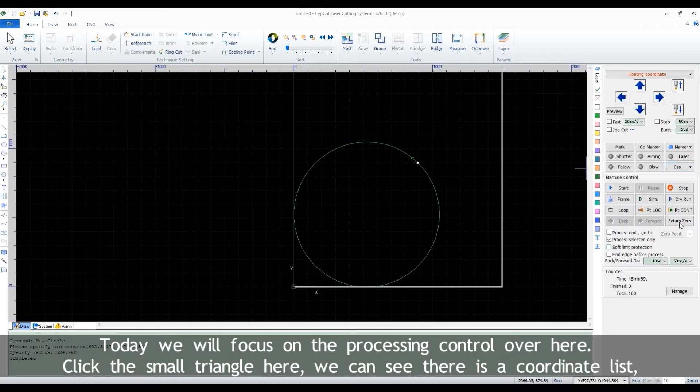Today we'll focus on the processing control over here. Click the small triangle here. We can see there is a coordinate list: floating coordinate, and several workpiece coordinates.

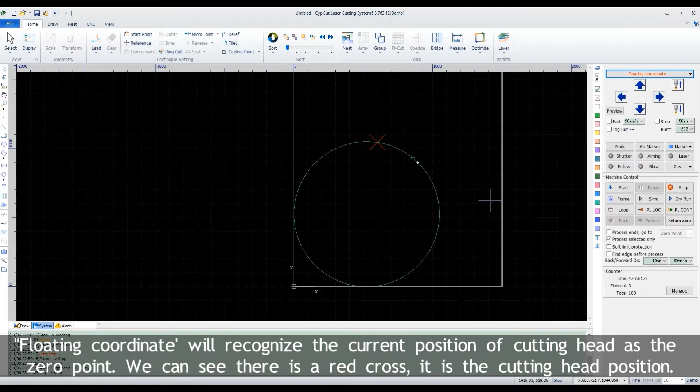Floating coordinate will recognize the current position of the cutting head as the 0 point. We can see there is a red cross; it is the cutting head position. Let's try to move the cutting head to any place and click Preview. We can see the 0 point has moved to where the cutting head is located. If we start cutting now, it will run the process at that position.

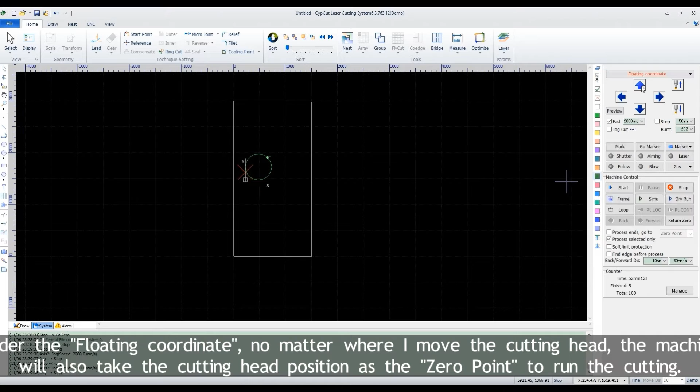Under the floating coordinate, no matter where I move the cutting head, the machine will also take the cutting head position as the 0 point to run the cutting.

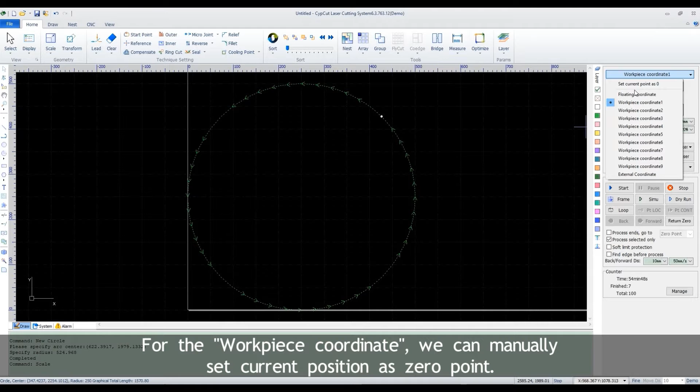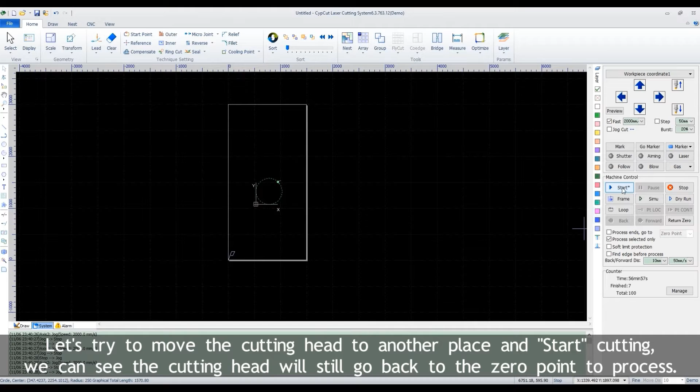For the workpiece coordinate, we can manually set the current position as 0 point. Let's choose workpiece coordinate 1. Move the cutting head, and we set the current position as 0 point. Let's try to move the cutting head to another place and start cutting. We can see the cutting head will still go back to the 0 point to process.

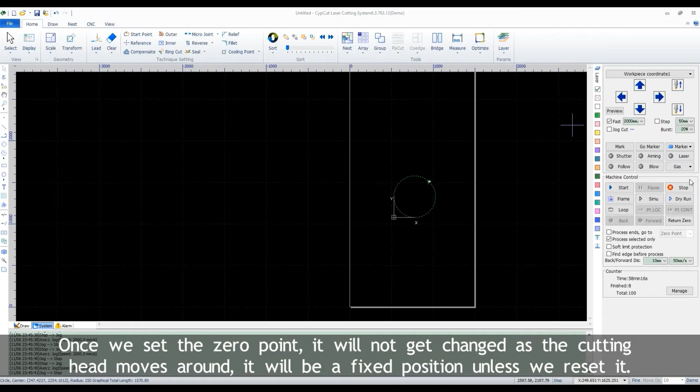Once we set the 0 point, it will not get changed as the cutting head moves around. It will be a fixed position unless we reset it.

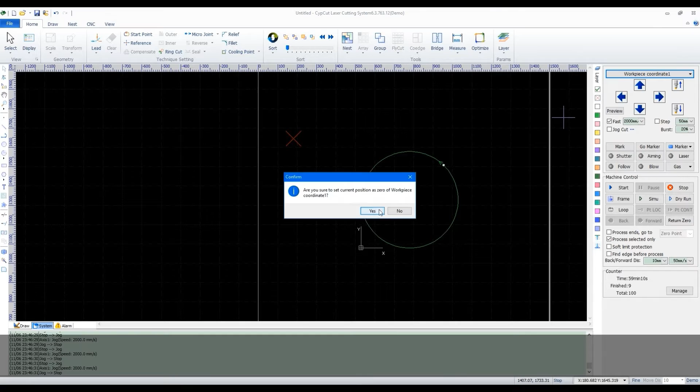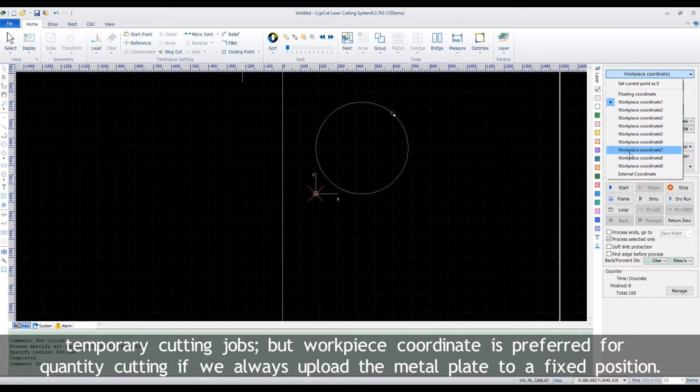Here we can tell the difference between floating coordinate and workpiece coordinate. Floating is more suitable for some flexible and temporary cutting jobs, but workpiece coordinate is preferred for quantity cutting if we always load the metal plate to a fixed position.

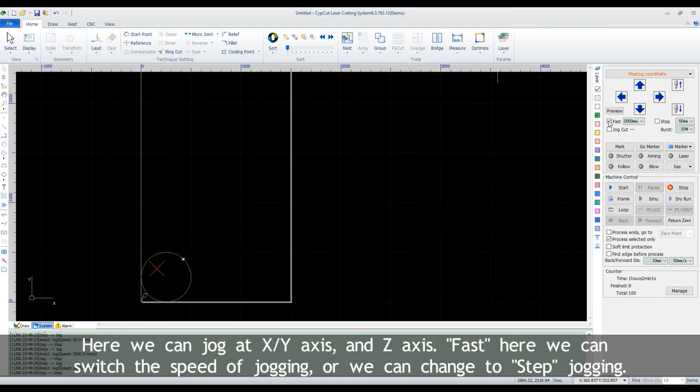At the bottom here, we can find accessorial functions to show mechanical or program 0 point or set 0 point. Here we can jog at XY axis and Z axis. Fast here we can switch the speed of jogging, or we can change to step jogging.

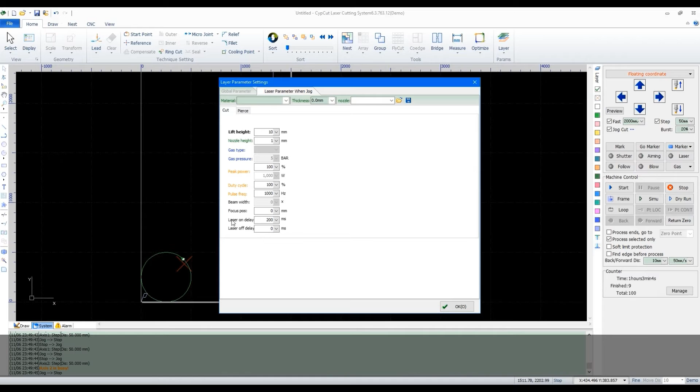Jog cut option: if we tick it, the machine will process cutting while jogging. It will help us to cut off the plate. We can set the cutting parameters at the ellipses. Burst is the powerful laser with just 10 to 20, especially when we try to find a concentric point between laser beam and nozzle. You can find a video on nozzles up here.

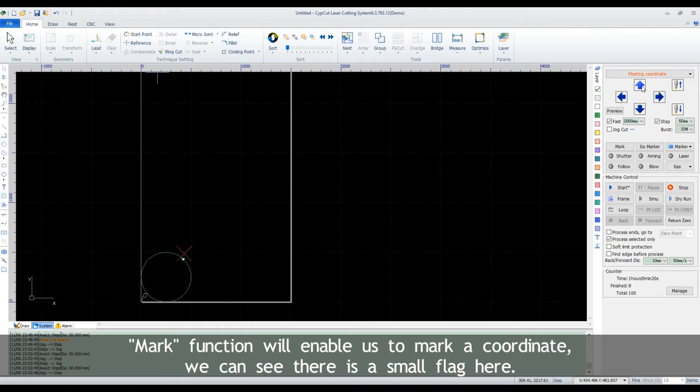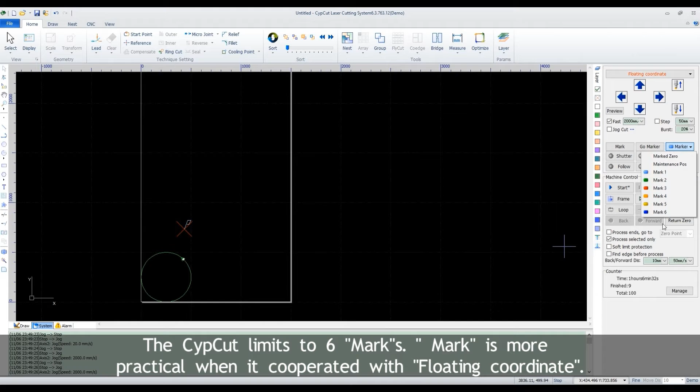Mark function will enable us to mark a coordinate. We can see there is a small flag here. Let's move the cutting head a little. When we click Go Marker, we can see the cutting head will go back to the flag position. CypCut limits to 6 marks. Mark is more practical when it cooperates with floating coordinate.

It runs in demo, no connection with the laser source, so here I cannot enable the shutter, aiming, laser. When we click Follow, the cutting head will follow. Blow will make the auxiliary gas blow out. We can choose the gas types here. It's in demo, so I cannot find the gas types.

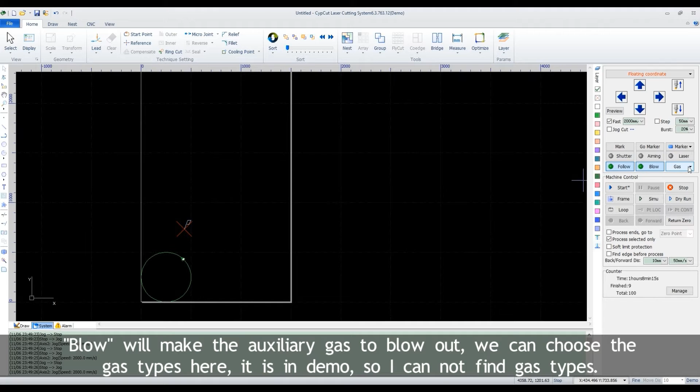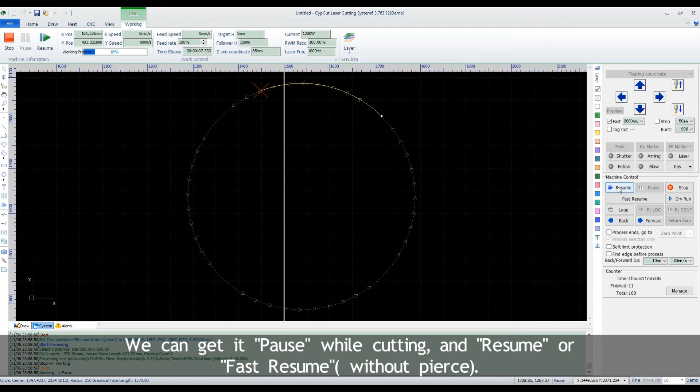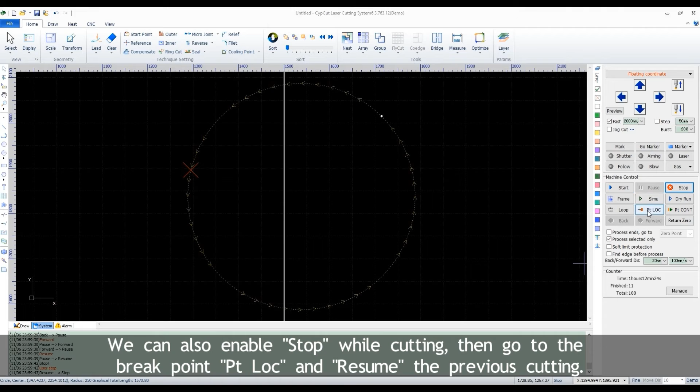Next is the machine control part. If we click Start, it will begin cutting the circle. We can pause it while cutting and resume or fast resume. We can go back a distance or forward a little to continue the cutting. Here we can set the distance and the speed for back and forward. We can also enable stop while cutting, then go to the breakpoint, Pt LOC and resume the previous cutting.

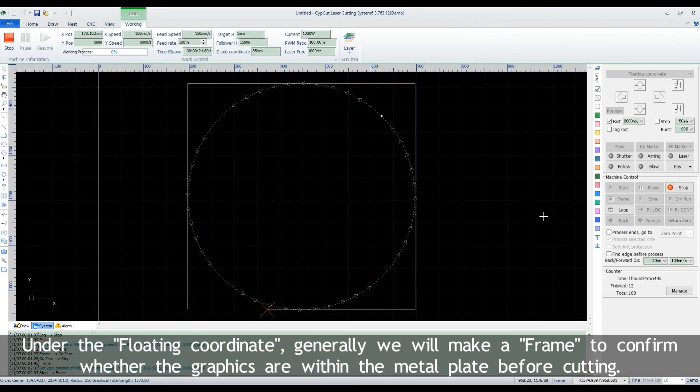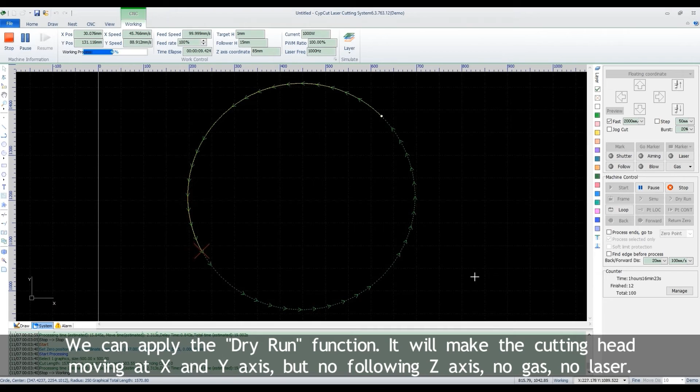Under the floating coordinate, generally we'll make a frame to confirm whether the graphics are within the metal plate before cutting. We can check whether the sorting is fine by simulating the process. We can apply the dry run function. It will make the cutting head move at X and Y axis, but no following Z axis, no gas, no laser.

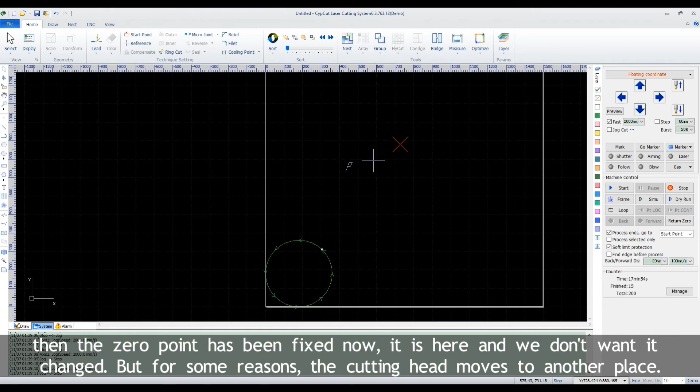Under the floating coordinate, like we're going to cut the circle, we make a frame first. Then the 0 point has been fixed now. It's here and we don't want it changed, but for some reason the cutting head moves to another place. If we want the cutting head to go back to the 0 point, we can click Return Zero. It will go back.

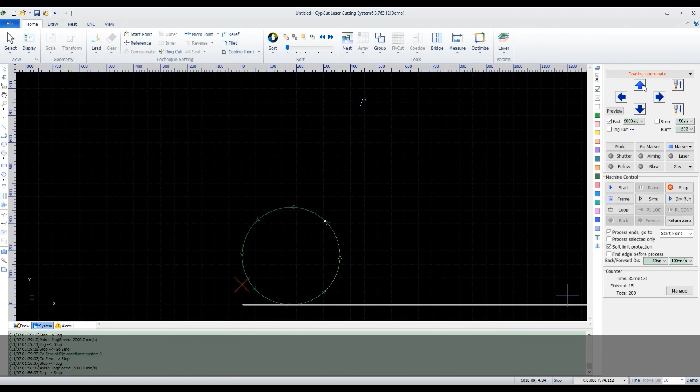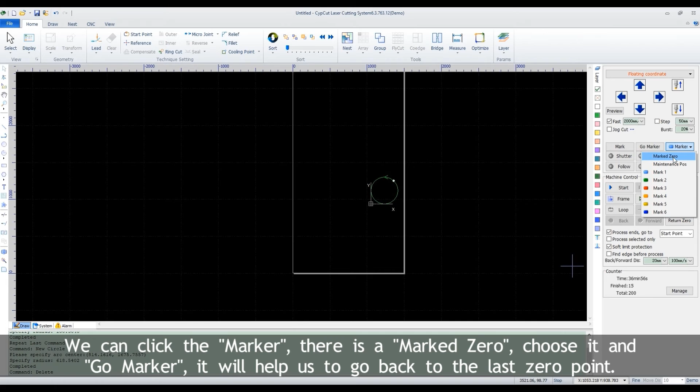The 0 point will get changed every time we use the frame function. Here, let's make the first frame. We can see the first 0 point is here. Let's make the second frame. We get the second 0 point. But if we want to go back to the first 0 point, what should we do? We can click the marker. There's a Marked Zero. Choose it and Go Marker. It will help us to go back to the last 0 point.

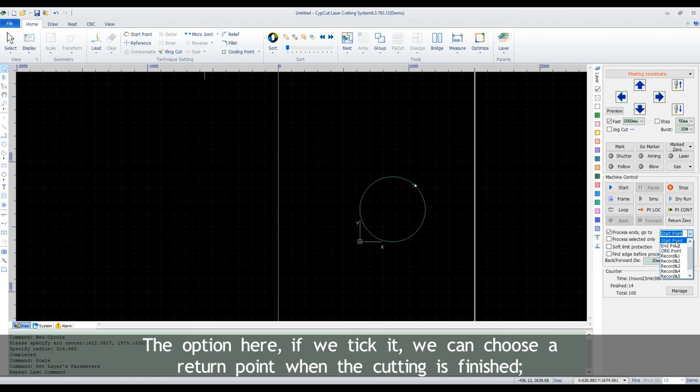The option here, if we tick it, we can choose a return point when the cutting is finished. Process selected only will only cut the graphic we choose. Like the rectangle and circle, we choose the circle and tick the option. We can see it doesn't process the rectangle.

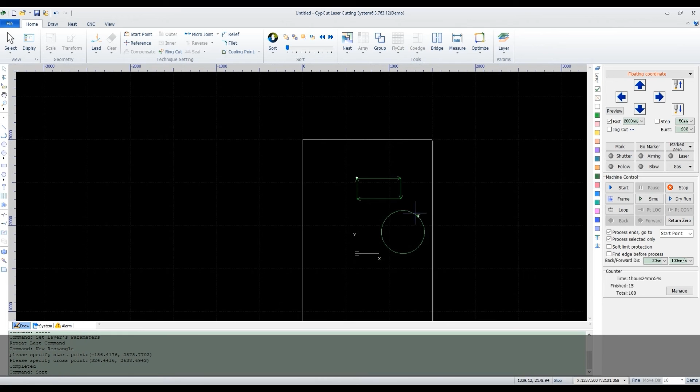Soft limit protection: if we tick it, the cutting head isn't allowed to go outside of the table. We just tick it under normal operation unless our machine needs to be adjusted under a professional engineer's guidance.

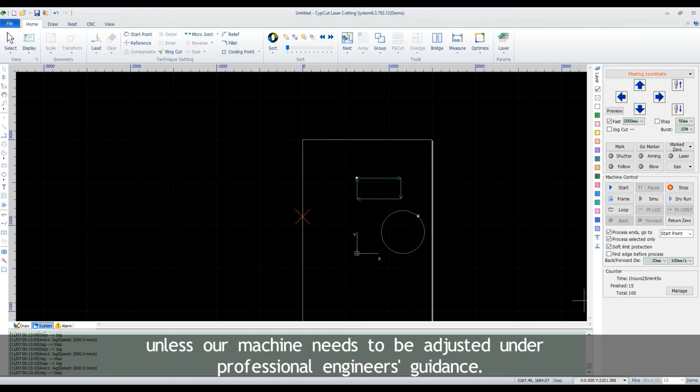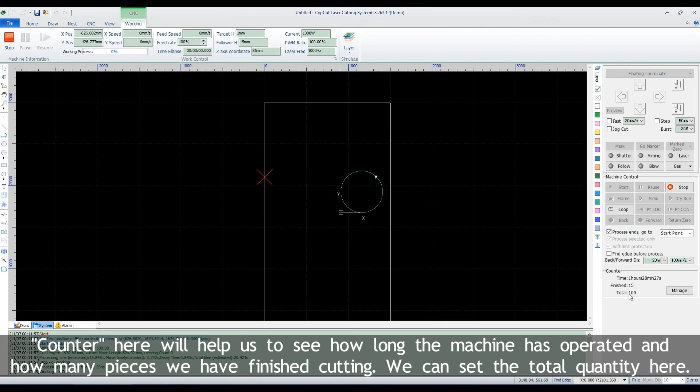Find edge before process: when our metal plate is placed a little skew relative to the XY axis, we can tick it. The machine will apply find edge first and then process cutting. Counter here will help us to see how long the machine has operated and how many pieces we have finished cutting. We can set the total quantity here. We'll see the draw system and alarm journal here. Double-click it, we can find the historical record.